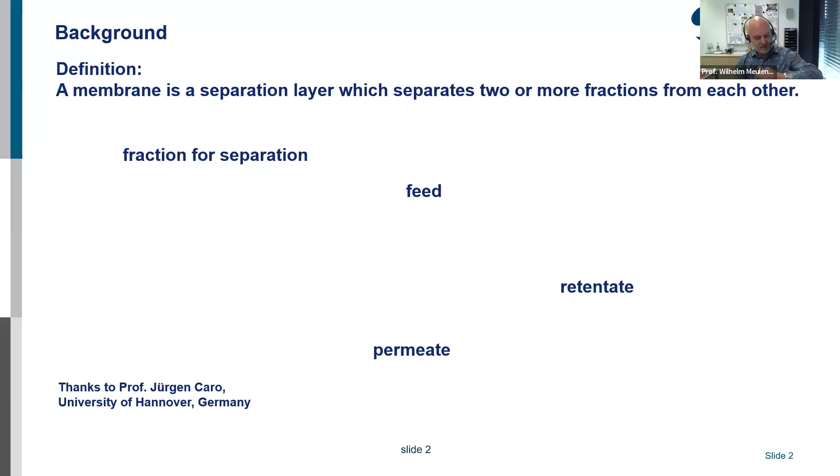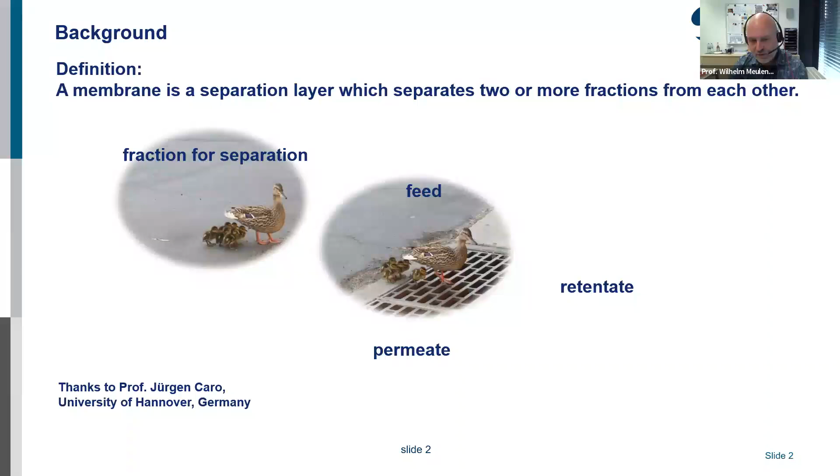I was inspired to explain this by Professor Jürgen Caro, who has a very nice explanation of what a membrane is. In principle, you start with a fraction to be separated, called the feed. This feed is distributed to a membrane, and then the retentate remains after passing the membrane, while the permeate is on the other side. I have to mention that no ducks were harmed — the ducks were saved after making this picture, Jürgen Caro said to me.

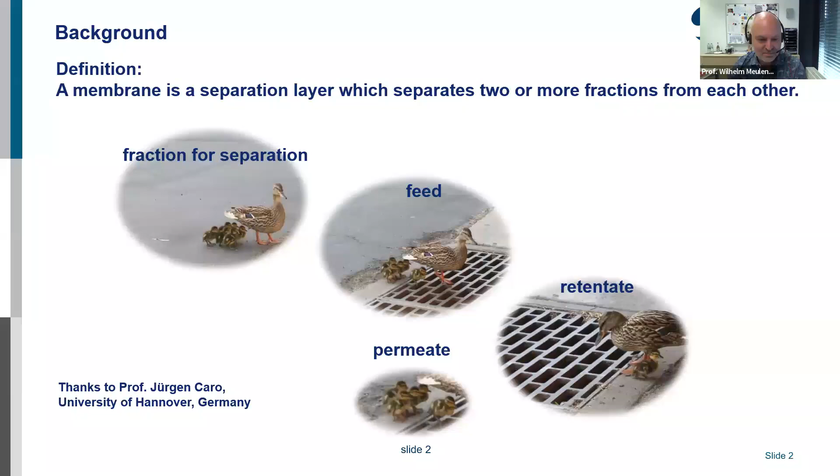So where is the application of such membranes? In principle, you can classify membranes by pore size. At 0 nanometers, dense membranes are ionic conductors — they have no pores in the system. Then we have the so-called microporous membranes, which range between 0 and 1 nanometer in pore size.

Then we have membranes above 1 nanometer, which are used, for example, for separation of blood cells, bacteria, viruses, or proteins. I have to mention that everything above 1 nanometer in pore size is already commercially available. So I want to concentrate today on the separation of gases and pervaporation — somewhere in the area from 0 nanometers, the dense membranes, up to 1 nanometer.

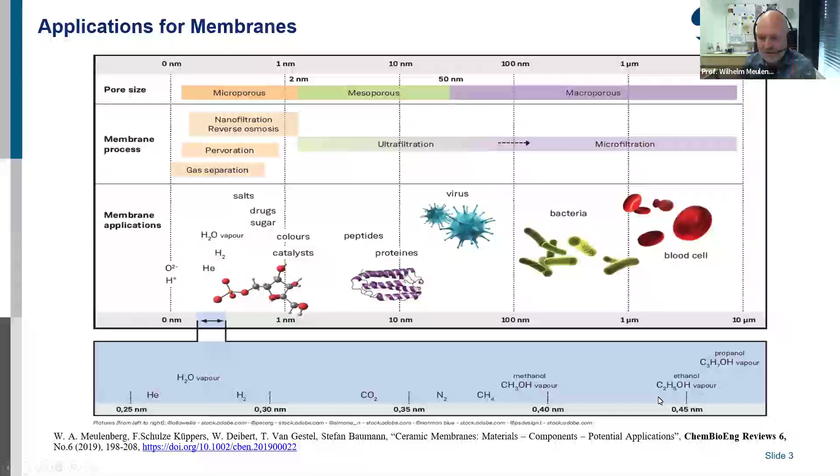If you look at this graph, you see the kinetic diameters of different gases. Helium is the smallest, and hydrogen is also very small. A lot of people don't know that water vapor is even smaller than hydrogen. Then you have, for example, CO2, nitrogen, CH4, up to 1 nanometer for the liquid organic hydrogen carriers. So which membrane classes are generally available?

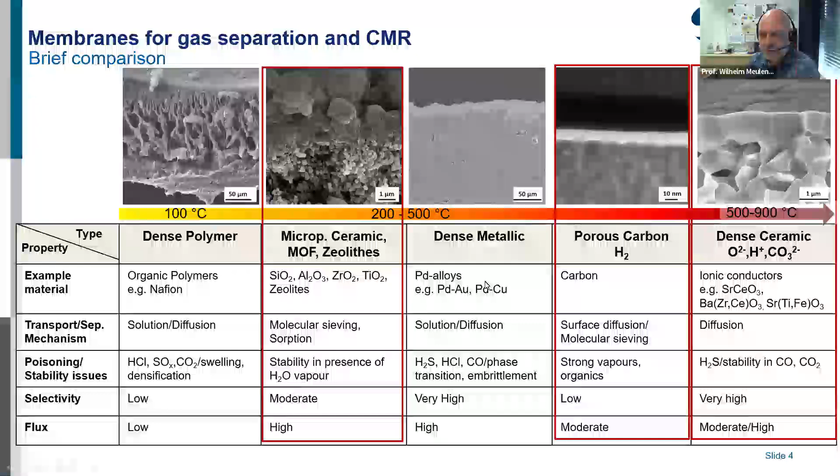In principle, we can differentiate polymer membranes, which are applicable in the low temperature area up to 100 degrees C. Then we have metal membranes, for example palladium membranes, somewhere in the range of 200 to 500 degrees C. I want to focus today on ceramic membranes, where we have the microporous membranes, metal organic frameworks, zeolites, and ionic conductors, which may be of most interest to you here.

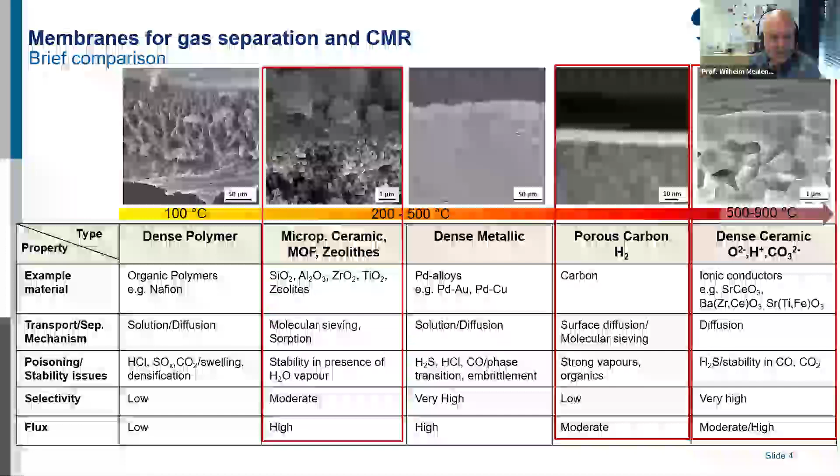So therefore I made an outline, and in principle I want to focus on porous membranes.

I want to show some new results of carbon-based membranes developed by a colleague of mine, Tim van Gestel. I have only one slide about the zeolites and the metal organic frameworks, and the second part is more concentrated on oxygen conducting membranes and hydrogen conducting membranes, meaning oxygen and proton conductors as dense membranes.

Let's start with the applications for porous membranes. In Germany, we have to switch our energy system. The last nuclear power plant in Germany was shut down last year. But in addition, there was a decision from the German government to reduce CO2 emissions, which means also reducing fossil power plants, so we have to switch very quickly to renewables.

You know always the problem we have with renewables: if you have a lot of wind and sun, we have a lot of energy available and we have to store it. If we have no wind and no sun, we have to use the stored material. Hydrogen is one resource that is very important as a renewable fuel, because it can be made, for example, by electrolysis or also by renewables.

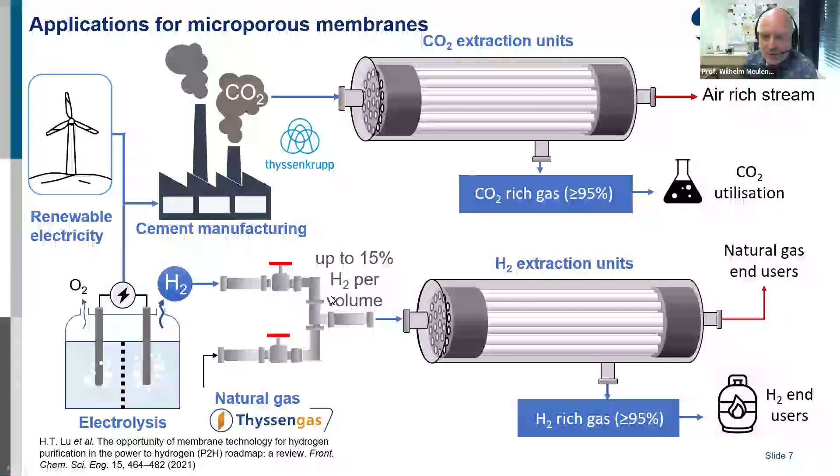That means a solution which can absorb a lot of hydrogen, and then you can use it for storage of hydrogen. When you need the hydrogen, you have to make a pressure swing, and then maybe you have to separate the LOHC gas from the hydrogen.

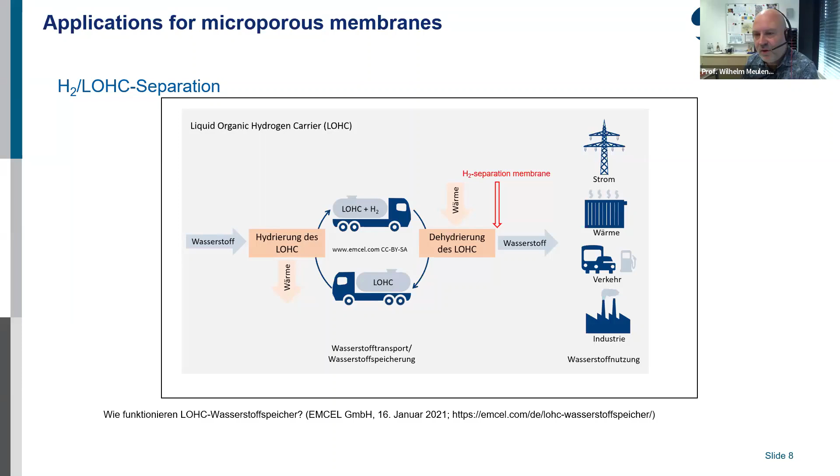Maybe a membrane is very interesting here too, because the pore size needed for this liquid organic hydrogen carrier, whose molecular size is up to 1 nanometer, compared with hydrogen which is below 0.3 nanometer, means maybe we can use already existing membranes for the separation of hydrogen from these liquid organic hydrogen carriers.

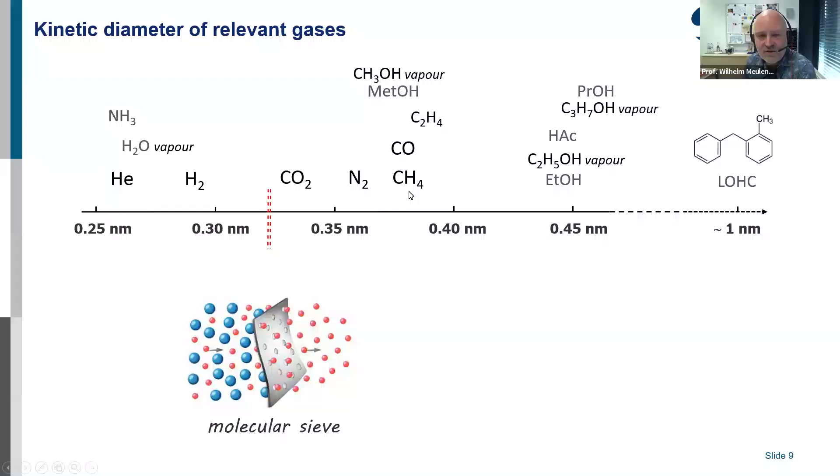But also the separation from water and alcohols is a very interesting application, or from CO2 and hydrogen, or CO2 and CH4, or H2 and CH4. So in principle, there are various possibilities for application of porous membranes.

So what is known? Now I want to start with the old stuff. In principle, when you look to literature and look at microporous membranes, you find some silica membranes. The silica membranes have an amorphous network, and in principle the name microporous is completely wrong, because we don't have any pores here - it's in principle a free volume in an amorphous network, which has exactly the size we need for separation of hydrogen and CO2.

But pure silica has very quick degradation in humid conditions, which we mainly have here. For this reason, it is stabilized by some carbon in the lattice, which means we can open the network a little bit, making this open volume a little bit bigger. But in addition, it then becomes more hydrophobic than hydrophilic.

Another option of the silica membranes are carbon-based membranes for hydrogen separation. Here it is also not a pore.

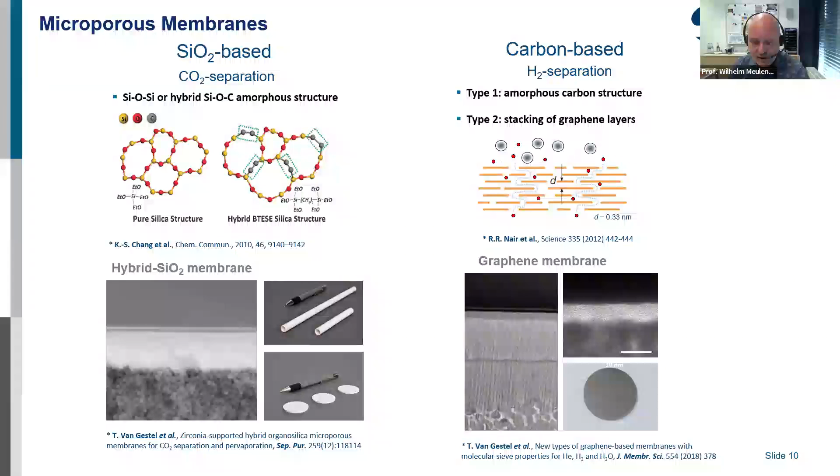Normally there are graphene or graphite layers, which have a distance between the layers also in the range of 0.3 nanometer, which enables the separation of hydrogen from other gases. There are in principle two types, which are already published.

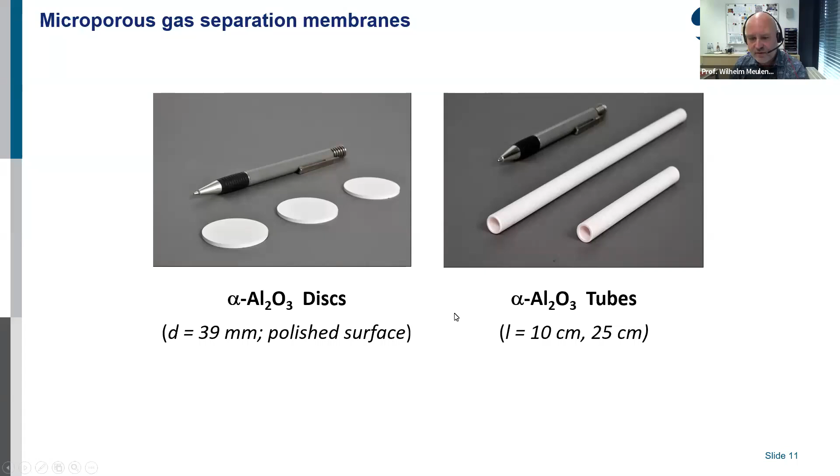If you look at the structure of such a membrane, normally you start with a commercial disc. You can buy it from a lot of companies. The discs are mainly alpha aluminium oxide. You can find it as a disc or as a tube. For a tube, mainly the inner side is coated with the membrane layers.

So the structure of such a membrane looks like this: you have here the support. The pore size differs from 50 nanometers up to a few micrometers, depending on where you buy the support. Then, before you make the microporous membrane on top, you need some intermediate layers to decrease the pore size. In the past, gamma aluminium oxide was used, but that is not very stable in humid conditions, so in recent years it was changed to 8YSZ membranes with pore sizes of 3 to 5 nanometers. These membranes up to here are currently commercially available.

So the question is now, when we want to separate gases, we have to add these hydrogen-selective membrane layers. What I already showed can be a silica or a graphene layer.

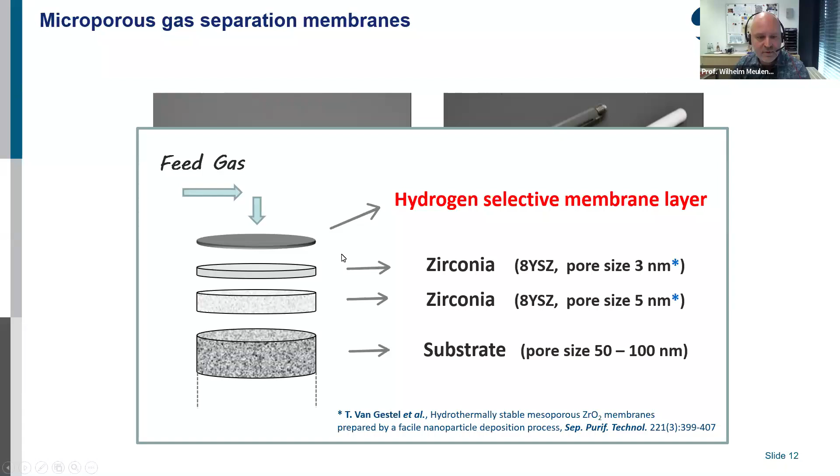And then my colleague, Tim van Gestel, was thinking how to increase this attachment of the membrane to the support layer, here the intermediate zirconia layer with 5 nanometer pore size. And here you see the graphene laminate.

One idea he got from literature, from our colleagues at MIT. These colleagues focused in their presentation on making some glues. They looked to nature, to mussels, and the question was how this mussel attaches to a stone - you see underwater that this attachment is very strong.

In this literature, you can see that these mussels use a super glue, and this super glue is a kind of dopamine, which is also in our body. Dopamine is something, for example, that our body produces when we do sports or when we feel happy, but it is also a super glue which the mussels use. What is very interesting is that this super glue hardens underwater, and it is also very fast under dynamic conditions. So the question is how we can use this idea from glue development for our membranes.

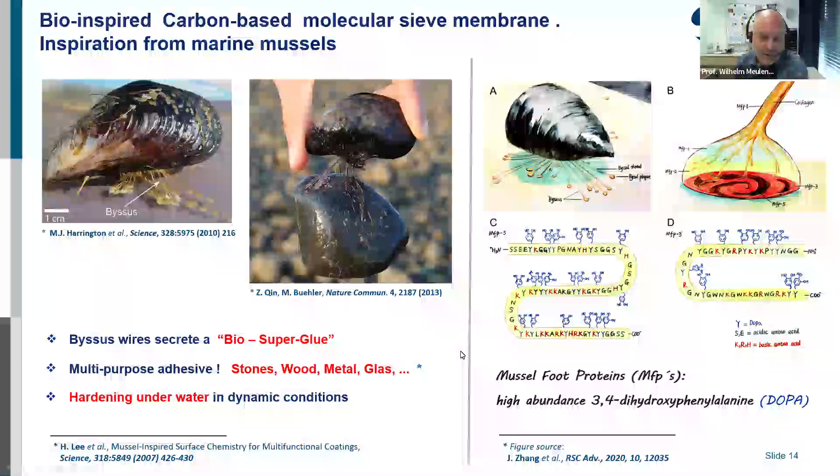So what we did then is we made, in principle, a water-based solution. We took dopamine from the mussels, so from this bio-inspiration, we mixed it into our water. We also have a buffer inside, and then we heavily stirred it and took our planar supports into this liquid. Then we can see that the reaction starts immediately after a few minutes.

After 20 minutes, you have a gray layer, and after 60 minutes, you have a big black polydopamine layer on the surface. The first idea was to coat our membrane with this dopamine to improve the performance, to improve the attachment of this membrane layer to the support.

Then we did, in a second step, a firing of this layer. So we transferred, through different steps in the furnace, this dopamine also to a carbon layer on top of this graphene layer. And it looks very nice - it has a very good structure without failures.

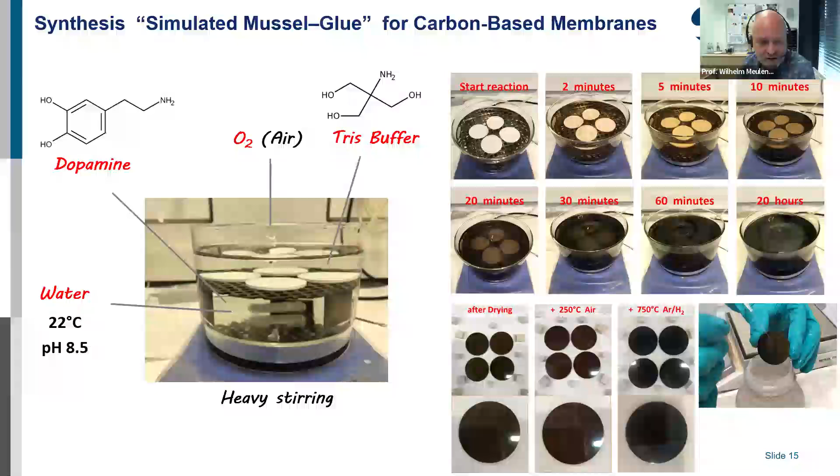When we then ran a gas performance test - and I have to mention this is a single gas test - we could observe that at a temperature of 200 degrees, CO2, nitrogen, and CH4 could not pass the membrane. That means our layers are in the range of the desired pore diameter. But helium and hydrogen, for example, could pass the layer.

We can also see we made different kinds of membranes here. The pure graphene layer is shown as the gray bullets, and the black layer is a graphene layer which we coated on top with a polydopamine layer.

And then we tested also again, without any graphene, the converted polydopamine layer. And we saw that it was much better than the graphene layer. So that means when we use a polydopamine membrane, we don't need any graphene layer on top.

Then the question was how the attachment looks like to the support. We looked to literature and there were no classified tests, so we had an idea. We went to our workshop, to our colleagues there, and said, please give us the most sticky band you have in the workshop. Then we put this band on top of the membranes and removed it again. Here you can see the result.

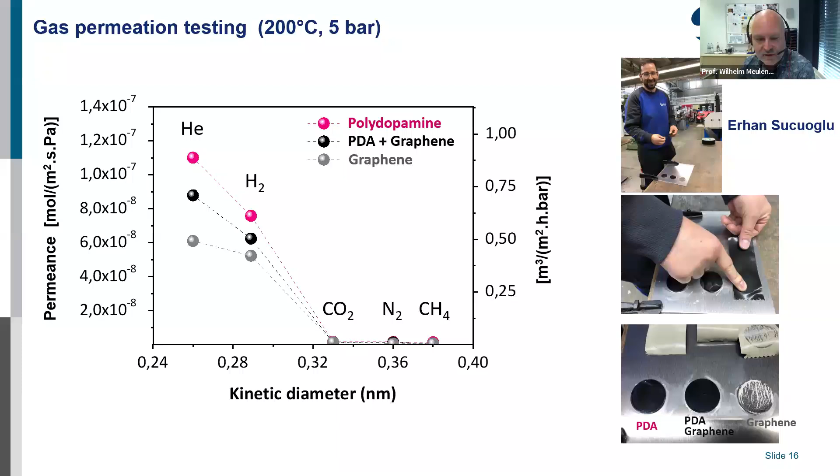So the next step is now to test it in mixed gases and also in humid conditions. We also want to know how the microstructure of this membrane looks like, because we are sure that it is not a similar microstructure to a graphene layer. We've asked for some TEM measurements and are waiting for this, and hopefully in a few weeks we can show you the microstructure. We also want to prepare a new paper about all these results, which are currently not published.

Regarding the temperature range where these membranes are applicable, we made a test between room temperature and 200 degrees C. What we observe is that at low temperatures, in principle, we don't have a good separation factor. But by increasing the temperature, we guess the distance between the layers or rings increases, and then we get some flux of helium and hydrogen, but still a very low amount of flux of CO2, nitrogen, and CH4. So we were able to achieve separation factors between 40 and 100 between the different gases.

You may ask why the separation is lower in the polydopamine, but it is quite similar. The performance here of CO2 flux is very low, and only, in principle, what is transported from CO2 determines the separation factor, not the large amount of hydrogen and helium that passes through.

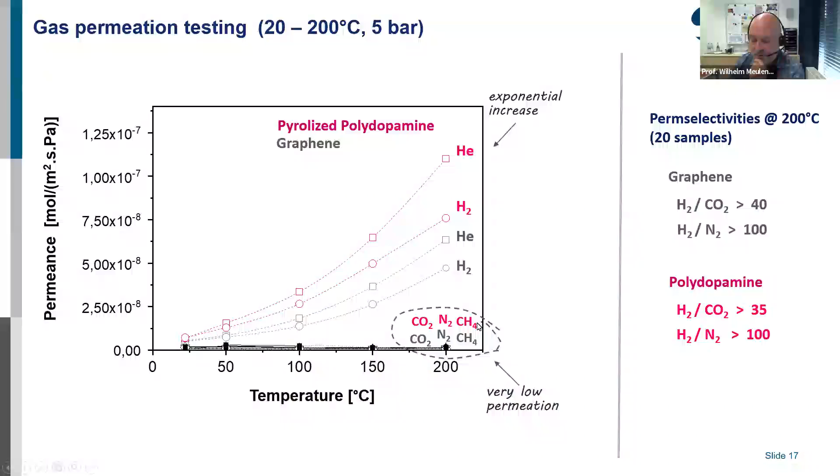I should mention we have a very large project running in Germany, coordinated by our colleagues from the polymer membranes group in Hereon, which is also a Helmholtz organization, coordinated by Thorsten Brinkmann. The idea is to test the membrane modules on flue gas in a cement plant at ThyssenKrupp Polysius in Beckum. That means we want to install a few square meters of polymer membranes in the flue gas stream of this plant and see how much CO2 we can separate.

In addition, we will also test a small module from half a square meter up to one square meter of the ceramic membranes. We also look at hydrogen separation, which is more of a focus for our graphene membranes, for example. We worked with Dillinger Hütte, a steel manufacturing plant, and their idea is how we can remove hydrogen from CO2 and CO containing gases to use it for firing in steel manufacturing. This project is running, and here are some results.

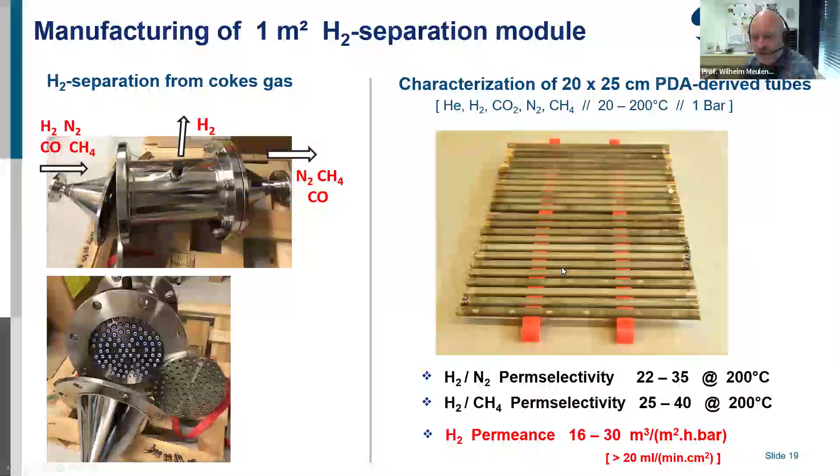So we have a module, and in the final step we have 100 tubes. The tubes are between 10 and 25 centimeters — in this case, 25 centimeters. You cannot see the coating because it is on the inner side of the tubes: a carbon layer. Hopefully we can demonstrate here, later in the large module, that we are able to separate hydrogen, for example, from these gases. We tested the single tubes — they are working — but we have to test it now in the real application to see if these membranes work there.

And also here we use the pyrolyzed polydopamine layer, meaning the carbon layer. As I already mentioned, you see a SEM picture of how it looks: we have the porous support here, we have the two zirconia layers, and then on top we have the polydopamine layer.

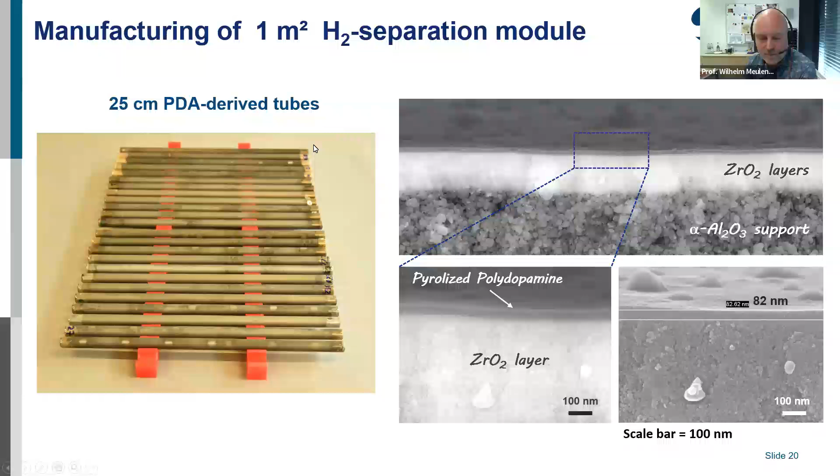A bit of the problem was that in the previous tests, we used a membrane from a Dutch manufacturer, where the pore size of the support was 18 nanometers. The commercial support we use here from ATEC is in the range of 1 up to 2-3 micrometer pore size. That means we have to make some more intermediate or thicker intermediate layers before we coat the membrane on top of it.

So just one word about this: you can do it with such a graphene membrane or silica membrane. Also in literature, if you look, you find some options about zeolites or metal organic frameworks. We didn't work in this field up until last year.

And then we have a young researcher, Marie-Alix Pizzucaro, from Twente - I wrote the name wrong, there's one C missing. Mrs. Pizzucaro got a young researcher group funded by the German Ministry of Research.

And we want to make now also membranes from these metal organic frameworks and zeolites, so the channels are very well adjusted to gas separation. The problem we have here is that we need oriented pore channels without any defects, and that is currently the challenge forcing this activity. But also here we want to look at similar separations, for example hydrogen and CO2 by molecular sieving.

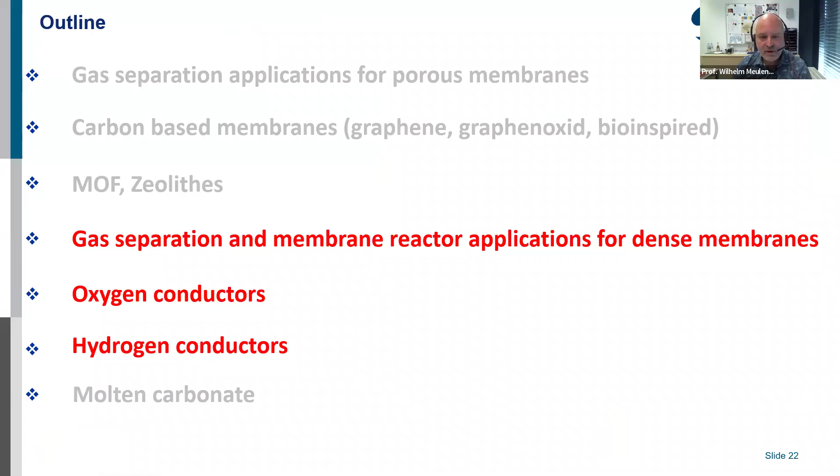Now let's switch from the porous membranes to the dense membranes. I will not talk about the molten carbonates, but some things about the dense ionic conductors.

In principle, we have two different applications for the dense membranes. One, for example, is pure gas separation. We started a lot of years ago on separation of CO2 from power plants, and we could realize this by oxy-fuel combustion. But the problem is you need a large amount of membrane surface, and that is maybe a little bit too hard for application of such an oxygen conducting membrane.

But also in other industries, pure oxygen or hydrogen is needed, and therefore you can in principle use such ionic conductors. If you have on one or both sides of the membrane a chemical reaction in addition, we call it a membrane reactor. Then we find several applications from CO2 utilization to the production of commodity chemicals and chemical energy carriers, and that is the focus of the next part of this presentation.

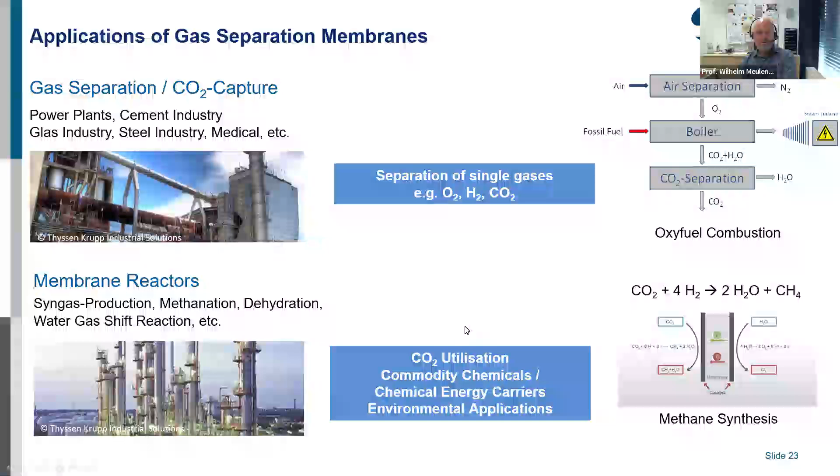When we started this activity in 2017, we first made a literature study. The question is: if you have a separation ionic conductor membrane, which applications are possible? That is all what we found in literature, and it's not clear that all this separation task really makes sense from a commercial or scientific point of view.

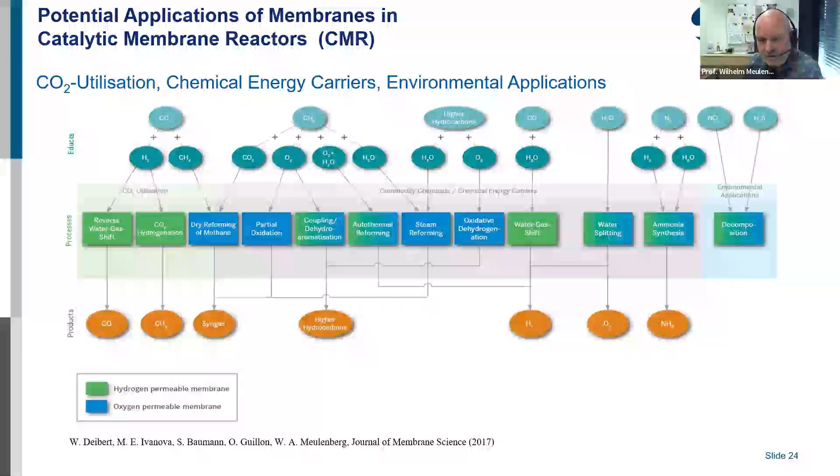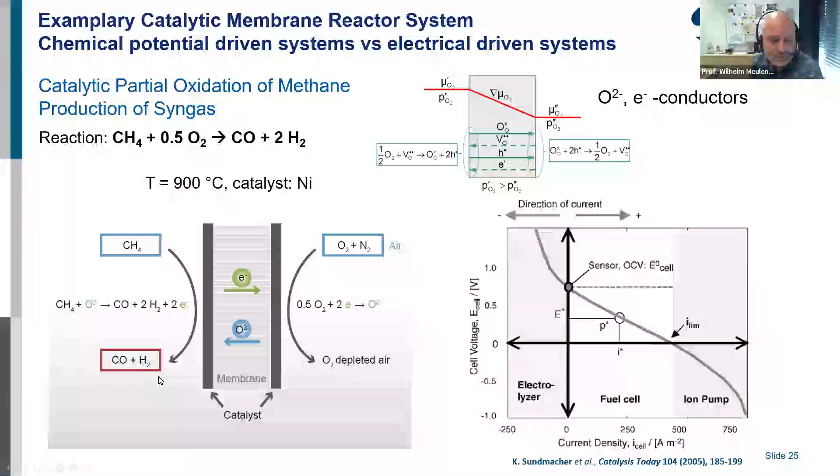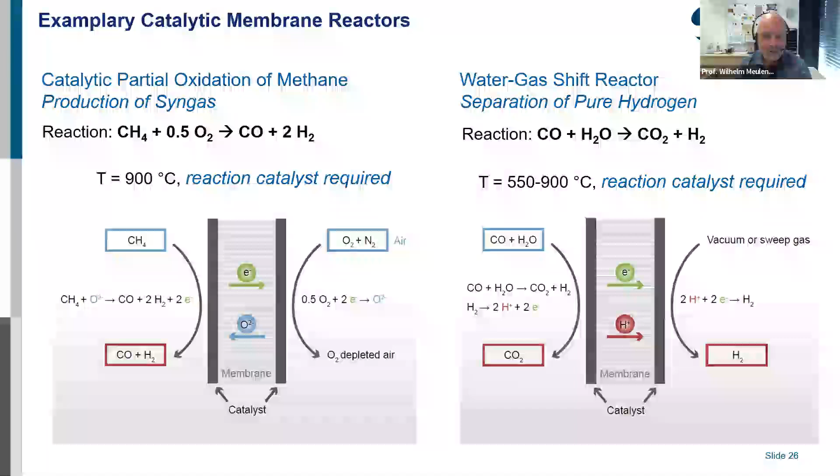And that are maybe not the most relevant, but they are the easiest to explain and also maybe to build. And that is why we decided to start with these two applications to develop it.

The question is now, what are advantages and disadvantages of electrical driven and chemical potential driven systems? Because here the driving force is not the outer voltage, it is in principle the gradient of the partial pressure or the chemical potential of the gases on both sides of the membrane. The advantage of electrical driven systems is it is easier to operate by changing the voltage, and it already has a high TRL level reached.

What I said, the transport is electricity and partial pressure gradient driven. But you need a more complicated construction. You need, for example, also conductive housing materials, and that is often a problem, because a colleague of mine recently published that 90% of the material cost of an SOFC stack lies in the material of the interconnect plates.

And that is in principle much better for the chemical potential driven system. The operation is more complicated, it is a lower TRL, but it is an easier design, and maybe you can decide for a non-conductive, very cheap steel, or also ceramic is possible here to use as a stack.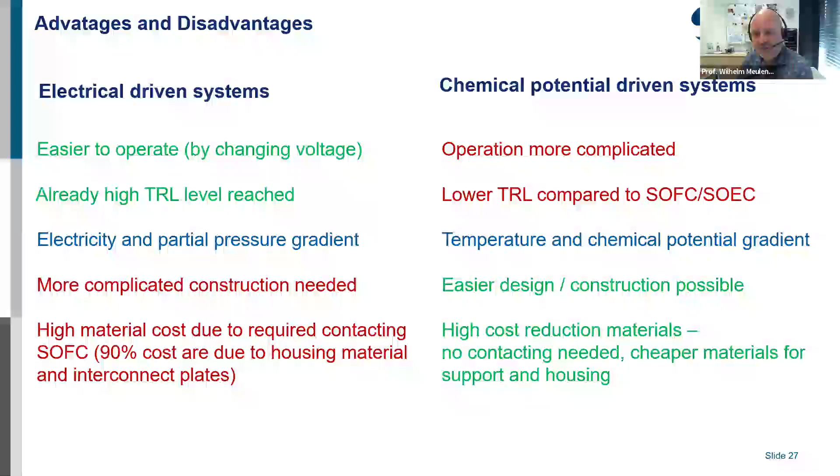The question always is, what is the best material for membranes? What is the best design? And when I talk with the students, there is only one answer which is correct: it depends always on the application. You have to look first at which application you want to use the membrane for, and then you can see what is the best material and what is the best design to apply this membrane.

Here in Jülich, we work on different material systems related to the different applications. For example, a lot of you know very well membranes from lanthanum strontium iron cobaltite perovskite LSCF, or from strontium iron-based STF material. We are able to make, by tape casting, membrane layers in the range of 20 to 30 micrometers in size, gas tight. We measure this by a helium leak test.

But also dual phase membranes may sometimes be of interest, because here you can separate between an electron conducting phase, which is, for example, an iron cobalt spinel layer, and gadolinium-doped ceria, which is a very good oxygen conductor. Then you need these pathways to ensure that you have conductivity everywhere.

And also for proton conductors, you have the conventional systems, which are also always shown by our colleagues from I²CNER, for example BCZY, that is a perovskite on the barium zirconate or cerate level, for fuel cells. But also we have some mixed conductors like lanthanum tungstate, which we're able to manufacture by tape casting.

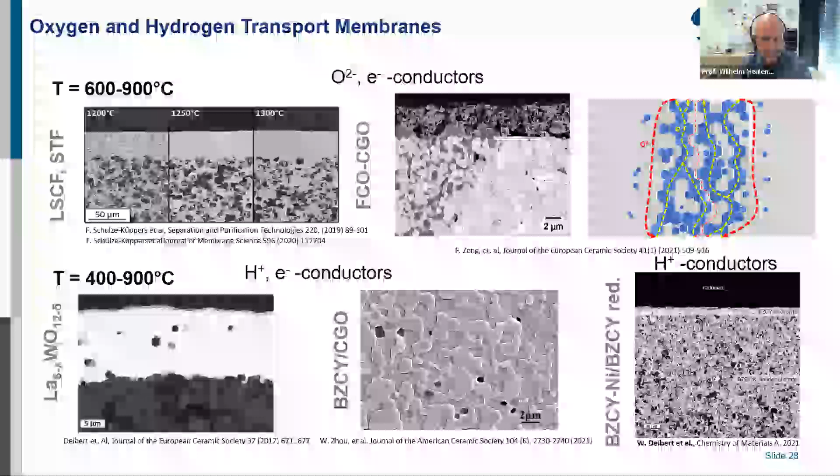So how does such an oxygen transport membrane work? In principle, you have the dense membrane here. You split the oxygen into an ion, and on the other side it reacts with the gas. There are some advantages. The application temperature is 800 degrees C. And then the question is how we can increase the performance of such a membrane.

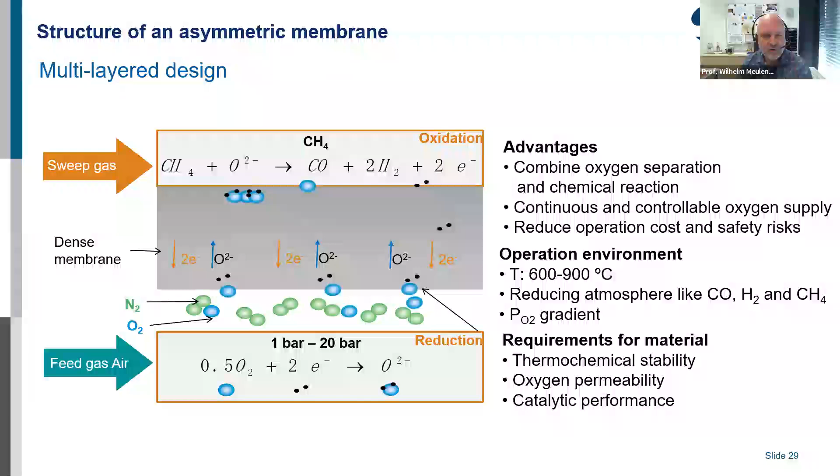We made a model, because if you look to literature, people always look to the materials and then say we have a BSCF, and that is a well-performing material. It has fluxes from 10 to 20 milliliters per square centimeter per minute, not like STF, which is maybe only below 1 milliliter, and then they decide very quickly BSCF is the best material. But BSCF is not stable in CO2 containing environments, and STF, the strontium-based material, is stable, but it has a bad flux in low partial pressure gradients.

But if you put it in a membrane reactor where you have a high driving force, for example on one side you have methane with a partial pressure of 10 to minus 20, and on the other side you have air, which is 0.21 partial pressure, then you have in principle a large driving force.

Most people said let's increase the material or reduce the thickness of the membrane, because already Henny Bouwmeester showed that in principle, if you reduce the thickness, we can increase the performance, but that is also not completely correct. We had a recent PhD work, which is ready and currently in the printing phase, and here we demonstrate that the material or the thin film is not always determining the flux, because if you have, for example, BSCF, the flux of the material and the surface reactions are so fast that the support here is the limiting step.

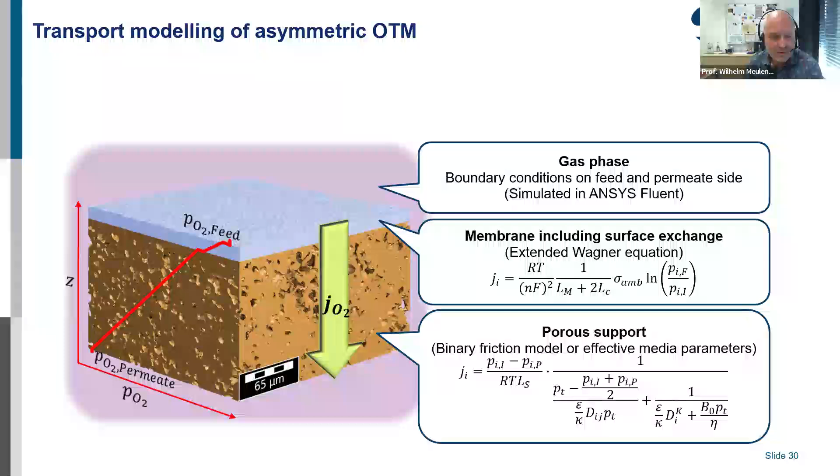That means we have to work on a low tortuosity here, and on pore sizes in the range of several micrometers. We also have to develop a thin support. It depends on the material which layer is the limiting step for transport - that can be the support, the surface reactions, the material itself, or the thickness of the membrane.

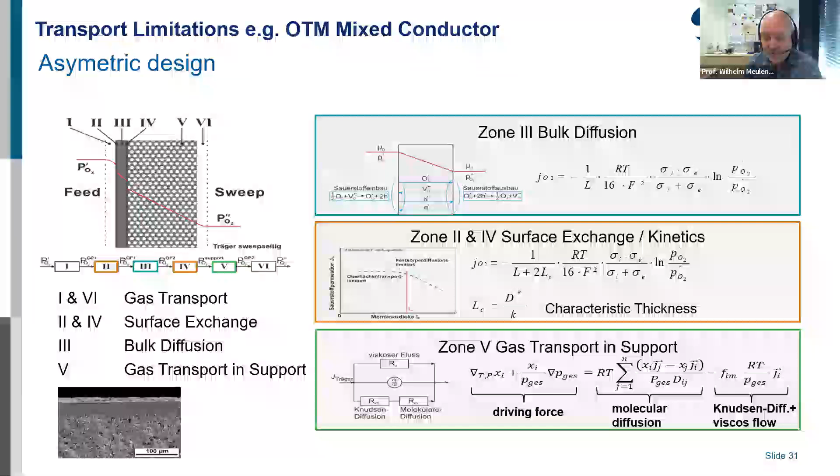That is what my colleague is working on - I don't have detailed results now, but if you're interested you can contact me. I guess in a few weeks there will be a complete PhD thesis available, unfortunately in German. But we will also write a publication showing exactly how the transport properties work in such an asymmetric design, and what we have to do to increase the performance of such a structure.

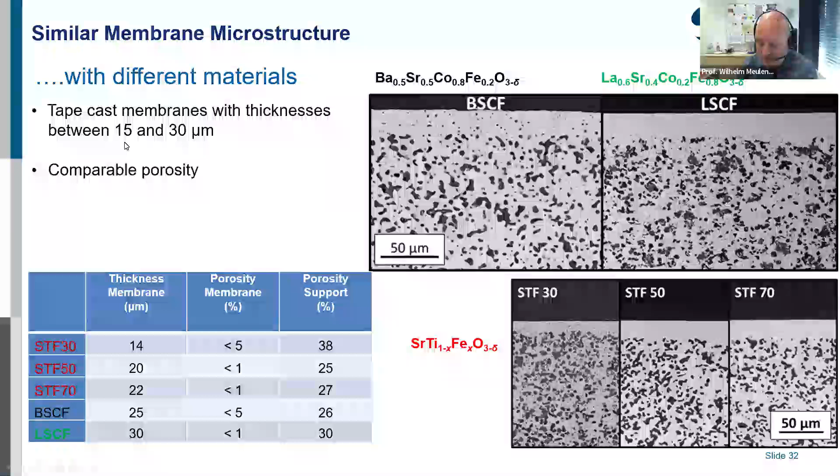So we produce it here by tape casting. I have a complete teaching course at university only about manufacturing, but in this lecture I don't want to focus on that. Here we show different materials which we managed to make with different support structures. The next step is to increase these 15 millimeter membranes to larger size.

That means what is of interest for later, maybe commercial applications - we scaled up first to 10 by 10 centimeter. That is, for example, an LSCF or a BSCF membrane with a different membrane design. And if you use the same temperature and sintering program as for the 50 millimeters, you produce only rubbish - the membrane is completely destroyed.

That means we have to work with very slow heating rates and with some ramps. Once all the organic material is removed, we can go faster to higher temperature, to our final sintering temperature, which is, for example, for BSCF 1100 degrees C. For LSCF, it's in the range of 1150 to 1200 degrees C.

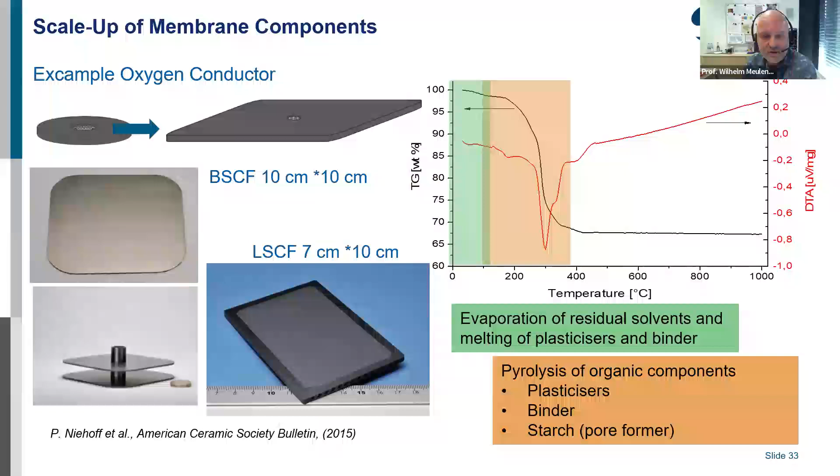Or if you look at the barium zirconates, where Pati is working, you can find temperatures up to 1700 degrees C. So here too, it depends on the material.

The next step, which we plan to do this year, is to bring one reactor into operation and demonstrate that partial oxidation of methane with such a mixed conducting membrane is possible. The first question was which material to select for this reaction. We have a very high driving force in this reactor, but we need a very stable material in very harsh conditions, including CO2 and maybe some SOx in the gases.

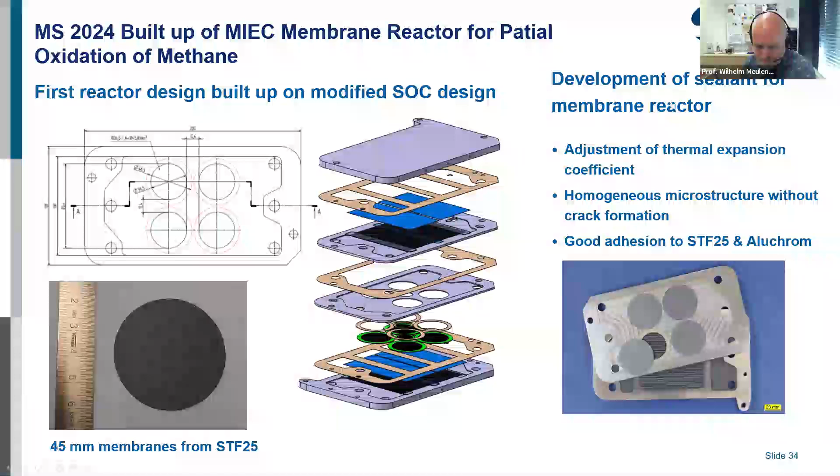We decided to go for an STF25, a strontium titanate-based material, which has reasonable performance under these conditions, comparable with LSCF. Then we use our SOFC design which we already have, modified a little bit. The next challenge is to seal the membranes into the housing.

We produced this first two-layer reactor type, and this reactor is now ready and waiting for testing. We have to wait until our SOFC rig is free, and then we want to test it for partial oxidation of methane by the end of the year. Hopefully then I can demonstrate to you that it is working.

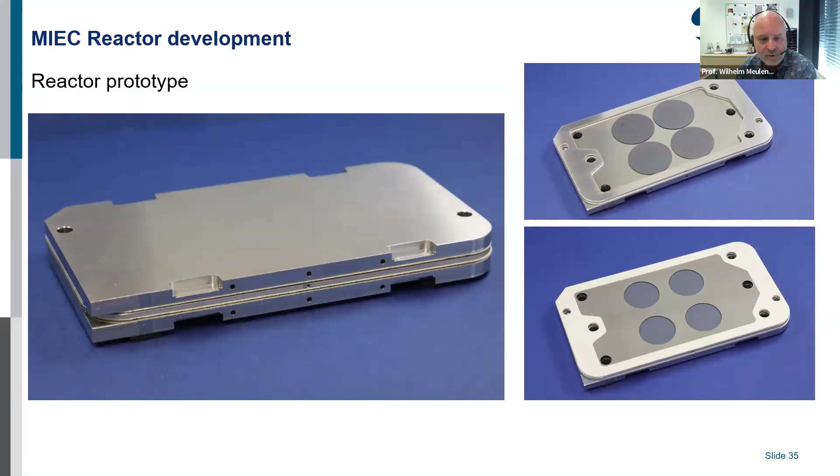People working on stacking know there are always some problems, sometimes with sealing or the membrane cracking, or other issues that can occur. That is what we have to take into account now - how to operate such a stack for a long time. We already managed it for SOFC - we operated one stack with an aging rate of 0.8% per 1,000 hours, up to 100,000 hours. That means more than 10 years, and that is demonstrated. That is also our target for next year, to demonstrate that this partial oxidation of methane is working.

So I'm a materials guy, but we also have some colleagues in other institutes in the former IEK-14.

They have now also a new name. I guess they are now ICE-2.

They calculated the desired reaction here, the partial oxidation of methane. You can calculate how much methane you have when you have a flux rate of the membrane, how much oxygen is permeating to it. We need exactly this ratio from CH4 to O2 of 2. Then we have a methane conversion rate of 95% and a very high selectivity of 97%.

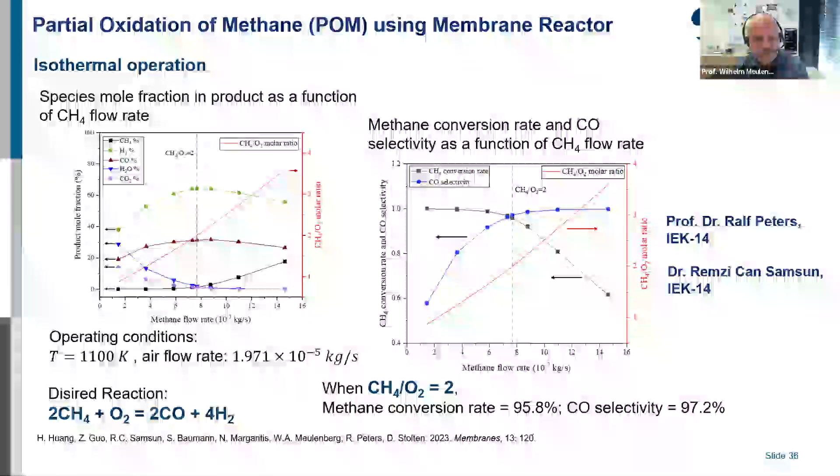That is what we are also doing here. We look at the complete system with 5 different institutes here in Jülich. Our part in this project is to increase the size of the membranes.

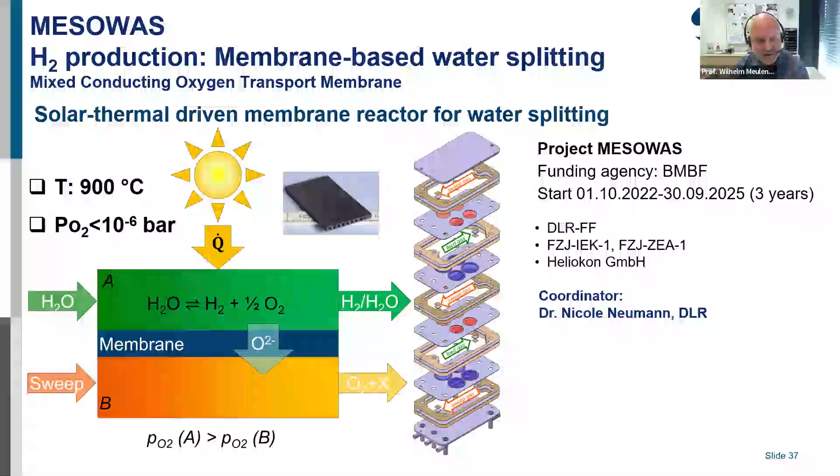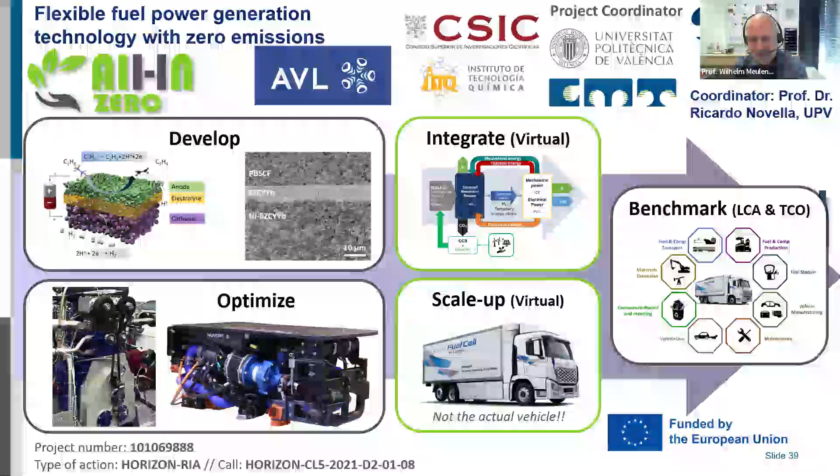We have another project on proton conductors with our Spanish colleagues from CSIC and University of Valencia. The idea is to make a hydrogen separation layer where we can remove hydrogen from, for example, ammonia or other fuels to use it then in a combustion system of a ship or a train. We started with some cells of barium zirconate, cerate electrolyte layer.

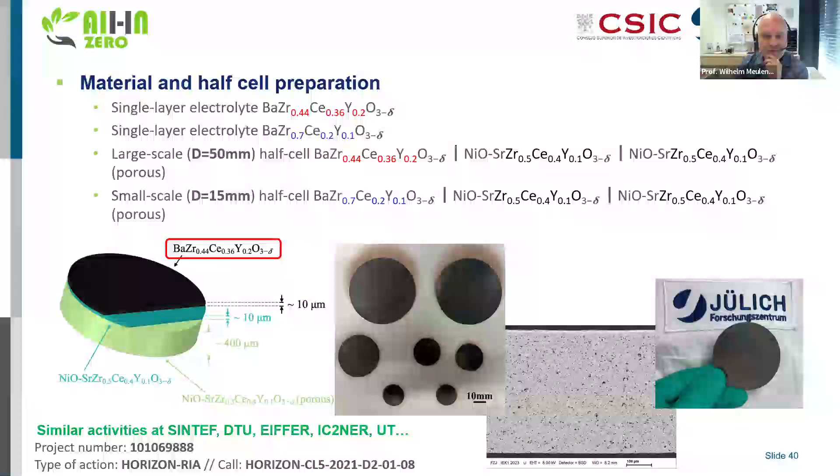Also a lot of other organizations like SINTEF, DTU, I²CNER, and University of Twente have some development here. We also work very closely together with Professor Ishihara, Matsumoto, and Kwati. Kwati is currently here for 10 months. He produced some cells here in Jülich.

One problem is the sintering. Here you see, for example, how the sintering happens for a 15 millimeter membrane. First the thin film on top shrinks, then the support shrinks, and you have to create, by this knowledge, a sintering program where your membrane is flat at the end.

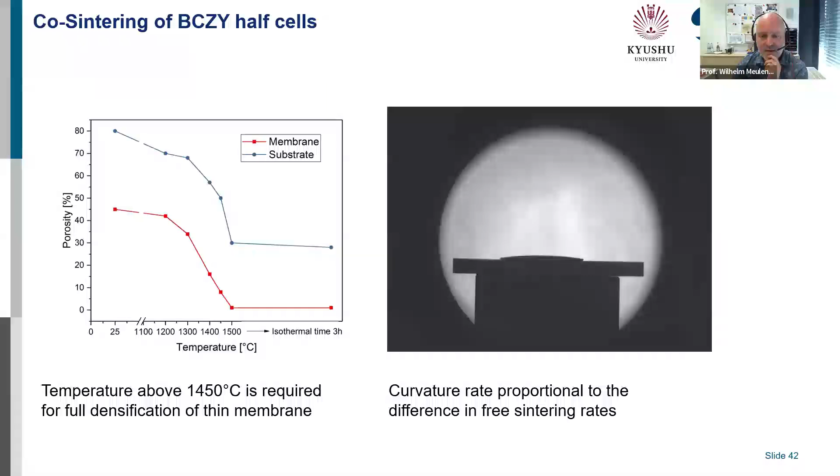We also wanted to know, together with another unit here in Jülich, how the chemical composition looks like in the electrolyte. Kwati gave this to this institution. We made a FIB lamella here.

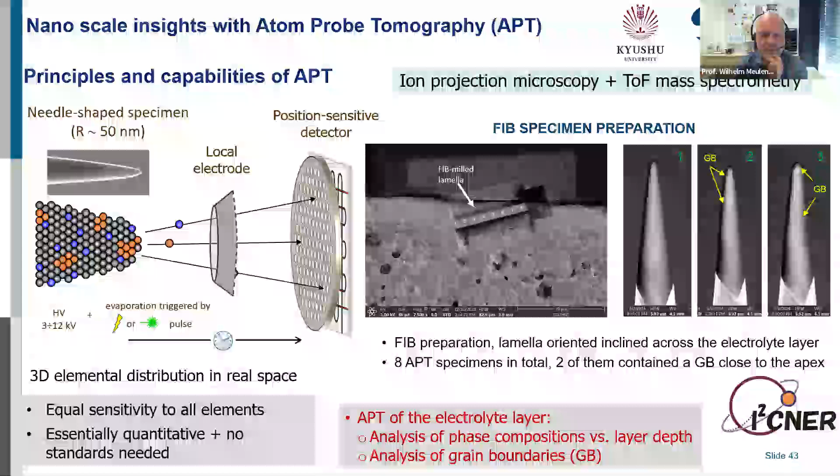Kwati already, I guess, wrote a publication which is currently under the process of reviewing. He also has very nice results with his cells. This is measured in Kyushu. He managed to reach very high current densities.

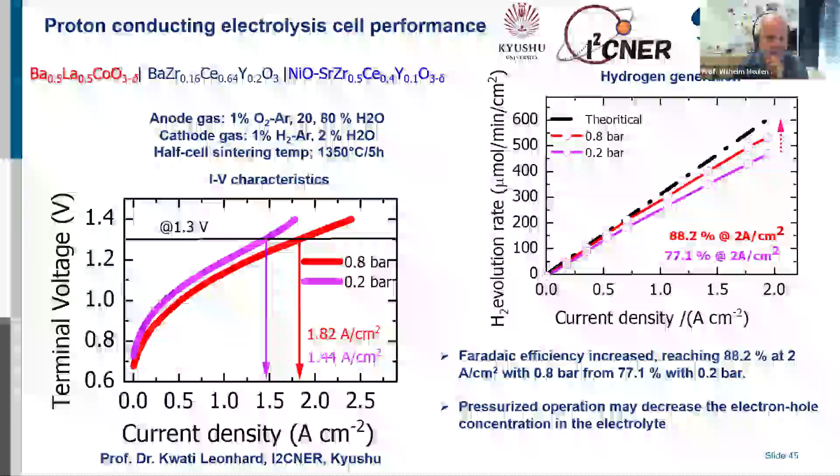I want to show another project which we have together with BASF, WZR, Shell, and some other companies. The idea here is the dehydrogenation of ethane to ethylene.

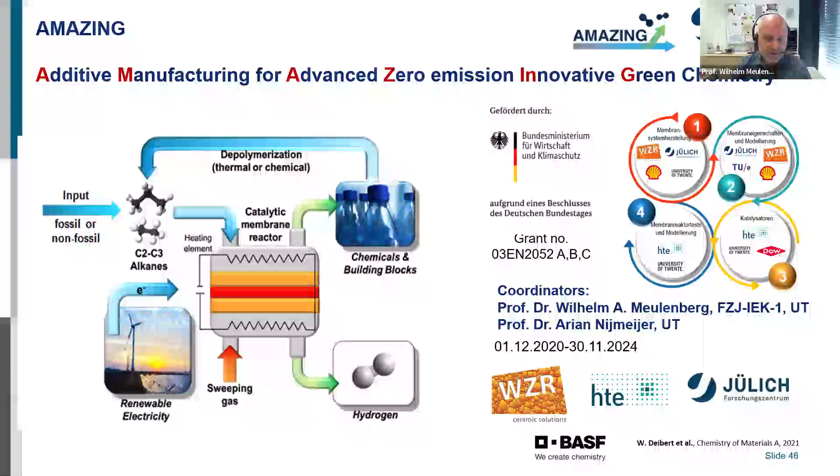For chemical applications, we have a project together with our colleagues from the Netherlands. We want to use first a mixed conductor. We built a reactor at BASF and HTE, which is a daughter company from BASF. We made some membranes from lanthanum tungstate and measured here the separation.

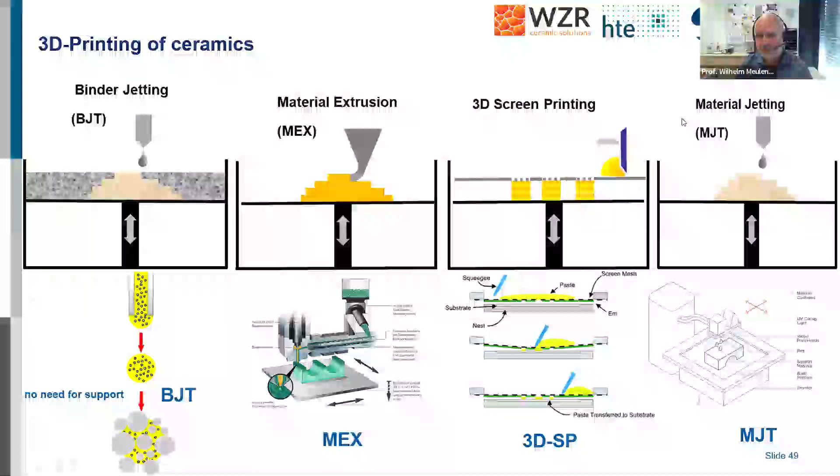We also look here to additive manufacturing, which means we look not only at tape casting but also binder jetting, material extrusion, 3D screen printing, and material jetting. We tested these membranes and were able to produce them together with our colleagues from WZR, to seal them in a metallic housing, and to test them in the test reactor.

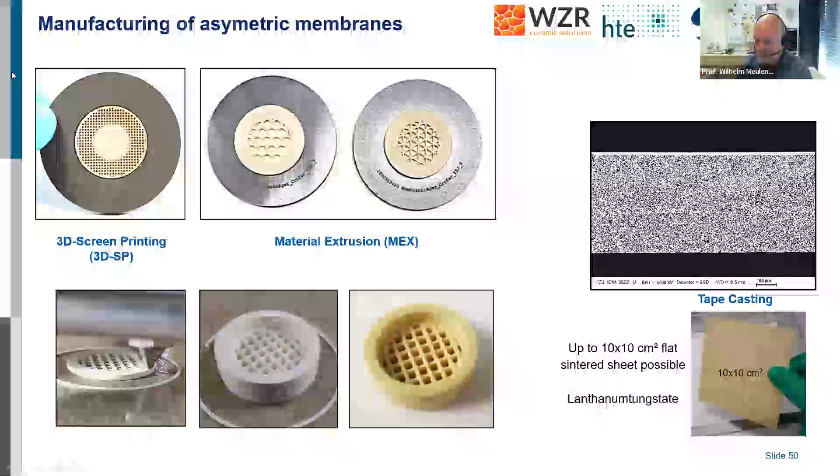There are a lot of new application options in separation tasks in the production of synthetic fuels and chemicals. Be open to these new applications. Be flexible in membrane designs - tubular or planar can be a benefit, it always depends on the application, like also the material selection. Do not focus only on world records and performance, as a lot of groups do. Also look at how it is stable under operation conditions.

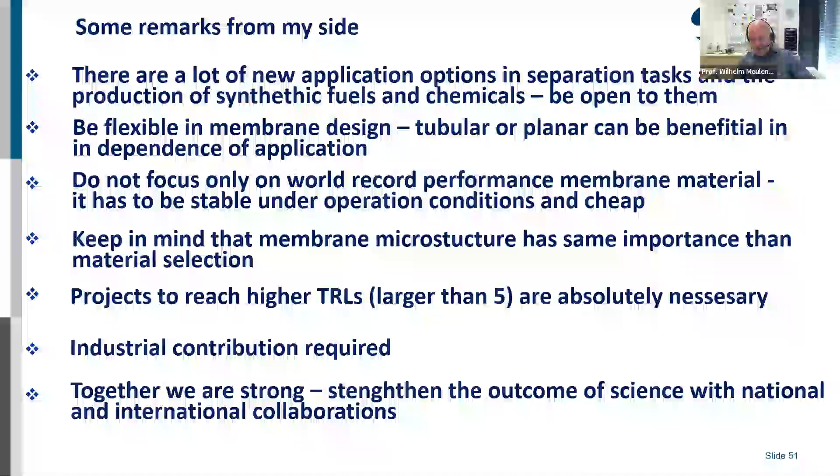The microstructure has a very important property if you want to come to good performances. We need projects with higher TRLs, we need industrial contribution, and the last sentence I want to close with: together we are strong. Strengthen the outcome of science with national and international collaborations. And that's my group currently.